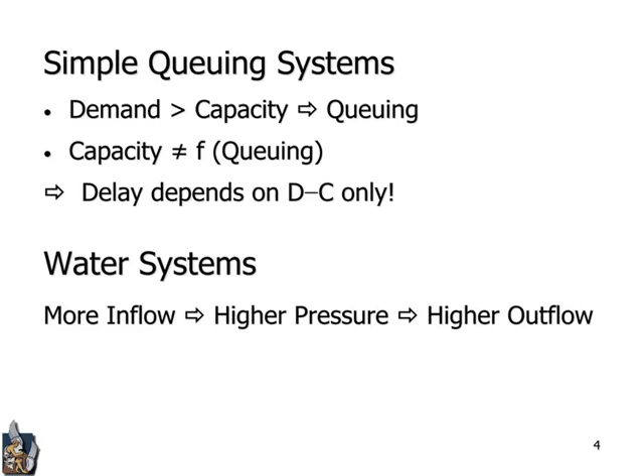There are other kinds of systems like water systems where things are completely different. If you have more demand, more inflow to a water network, then you have higher water level in the network, queuing, but this gives rise to a higher pressure and higher outflow. In fact, under higher demands and higher queuing, you get an increased outflow, which means that the capacity of the system is influenced positively, it increases with increased queuing, which is different than the simple queuing system.

Now, what happens with traffic networks? Well, traffic networks are different than both of those two kinds of networks because the congestion degrades the infrastructure capacity. Now, what are the reasons for that we will see in a few minutes. But if we take this as a fact, then at the start of the peak period, you may have actually demand at the local level, some links of the network, that exceeds the local capacity. And in this case, the local congestion degrades the local capacity.

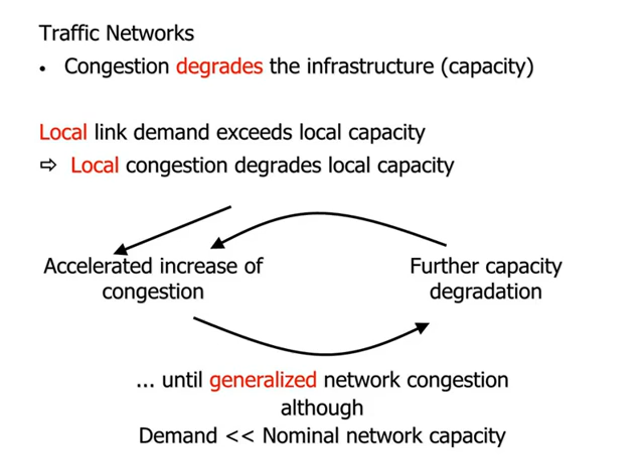This leads, of course, to an accelerated increase of congestion, which means further capacity degradation, which means further accelerated increase of congestion. And so we get a vicious cycle that eventually leads to a generalized network congestion over big parts of the network. Although, if you look at the actual demand, or if you look at the traffic flow that is actually served, it's much less than the nominal network capacity. That is because the network is degraded, and so the traffic that can be served is much less than the capacity.

This is an illustration of what I was telling. It happens to be the Ile-de-France expressway network around Paris. So you see Paris and the Boulevard Périphérique around it, and then secondary and other motorways. So the image that you see was taken on 12th January 2011 at 8:14 a.m. It's the morning peak hour. It was taken for a day where there was no accident or incident before this time. So the congestion is really a recurrent congestion. There is no implication of incident here.

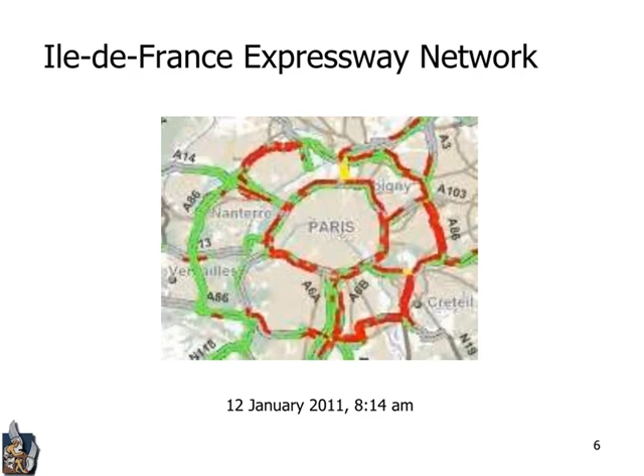And this means, of course, the red color is congestion, and you can imagine that the network does not perform as it should during nominal capacity. And this happens, of course, not just here, but in virtually any network around the world. So, in conclusion, the generalized motorway congestion that we experience daily is not only due to high demand. Of course, it is triggered by high demand, but it is then sustained and maintained due to the degradation of the infrastructure capacity.

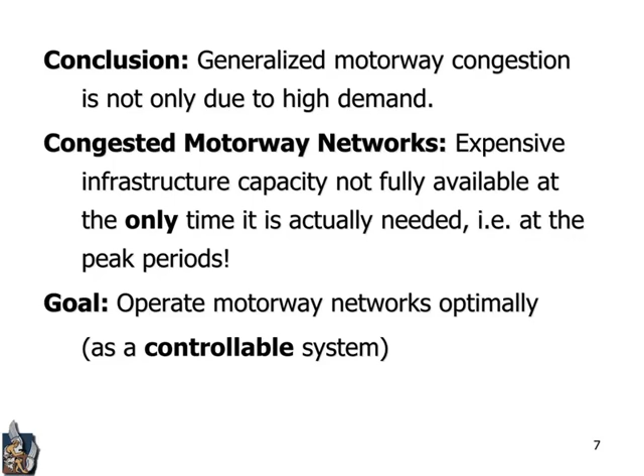And in fact, when our motorway networks are congested, this means that we have a very expensive infrastructure, expensive to build, expensive to maintain, which is ironically not fully available at the only time it is actually needed, which is at the peak periods. So off-peak periods, we don't need it anyhow because we don't have the demand, and then during the peak periods, we don't have it because of the degradation. And so the goal is to operate motorway networks optimally as a controllable system.

Now, to advance here, we need to ask the question, what are the specific reasons for the degradation that we mentioned before in the case of motorway networks? Well, as you know, usually bottlenecks are the origin of congestion. And a bottleneck can be defined simply by saying that it's a location where the capacity upstream is higher than the capacity downstream. And the bottlenecks are candidates for congestion, and we have bottlenecks, for example, due to on-ramps merging,

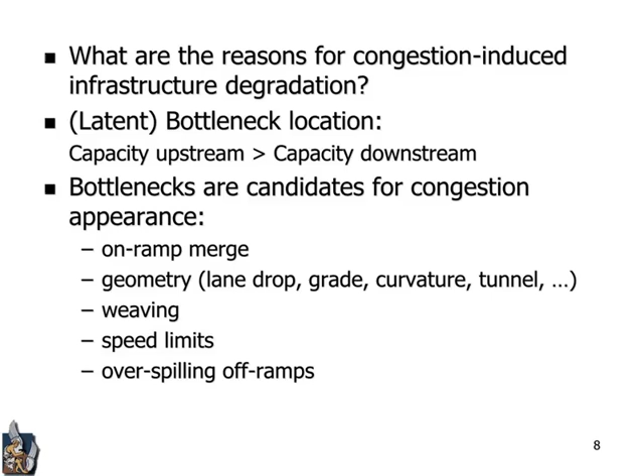or due to geometrical reasons: lane drop, grades, curvature, tunnel, bridge, and so on. Or a weaving section can have less capacity than another kind of section, or speed limits, and so on. So all these are reasons why we could have a bottleneck. Now, what happens at the bottleneck? We have two main reasons for the infrastructure degradation. The first reason is what we call capacity drop. Consider here on the slide a bottleneck, which seems to be a lane drop bottleneck, but it can be any kind of bottleneck. It doesn't need to be lane drop.

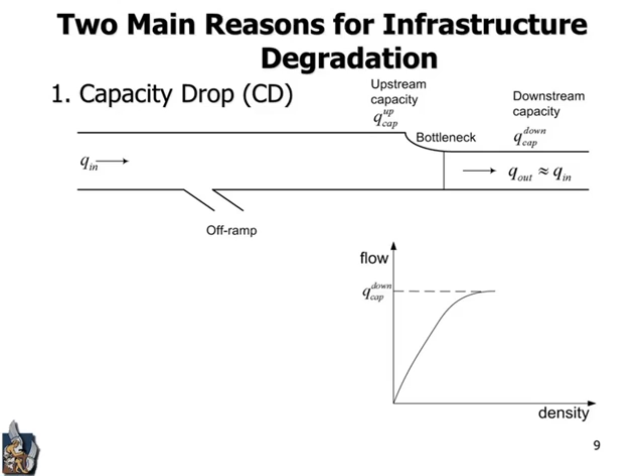So we have an inflow entering, and if the inflow is lower than the downstream capacity, which is essentially the bottleneck capacity, then it will go through, and there will be nothing spectacular happening. And if you see the diagram below, the fundamental diagram, flow versus density, we are talking about operating on the left-hand side of the curve, which means that this can happen up to the point where we reach the downstream capacity.

When we reach that, or when we exceed that, the bottleneck is activated, a congestion is formed, the tail of the congestion moves upstream, and the outflow, as you see in the fundamental diagram, drops at the area of the red crosses where the system now will operate, and this difference between the pre-breakdown capacity and the after-breakdown capacity is called capacity drop.

Although the reasons for capacity drop are not yet fully understood, there are a lot of people, including me, who believe that a major reason for that is the fact that vehicles need to accelerate at the head of the congestion from lower speed within the congestion to higher speed downstream of the congestion. And due to this acceleration, we have the lower flow.

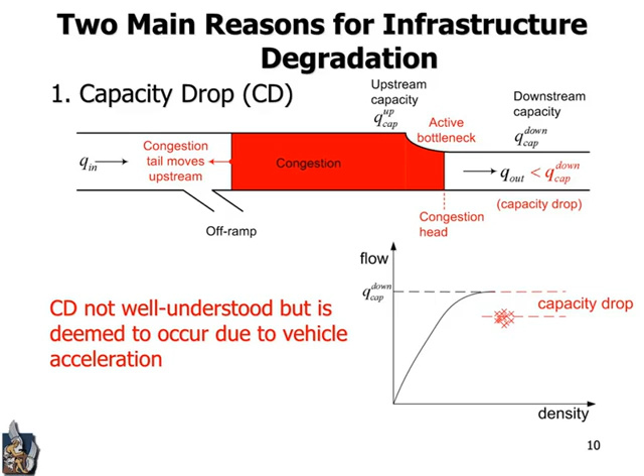So in any case, the capacity drop marks a significant, the numbers that have been reported range from 5%, 10, 20, 25% capacity drop. So this means that the infrastructure is actually degraded, because on our mainstream we now have whatever percentage, 10, 20% of flow less, of capacity less than before congestion. So this is the first reason.

The second reason has to do with off-ramps. The congestion that has formed will propagate upstream, its tail will propagate upstream, and will start covering off-ramps. So every time it covers an off-ramp, the flow of the off-ramp will be reduced, because the flow in the congestion is less than upstream of the congestion.

And so by what we said in the introduction, if the off-ramp flow is reduced, then the system, of course, will be degraded. In this case, simply because vehicles and drivers who are bound for off-ramps, who are not interested to pass the active bottleneck, they would exit before. But because of the extent of the congestion, they are also trapped in the congestion, they also experience delay, and in fact, they also contribute to an accelerated increase of the congestion.

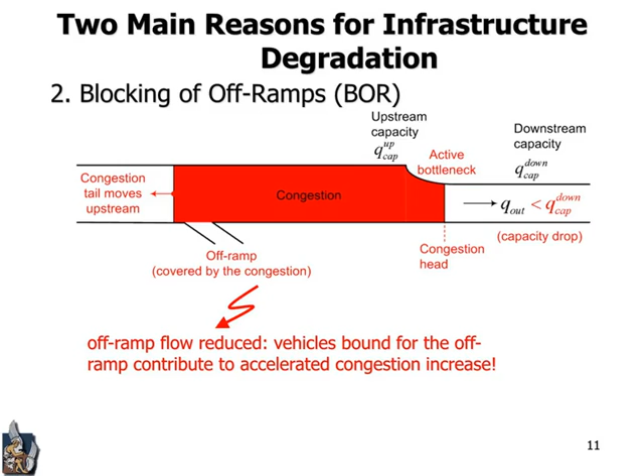And this happens every time an additional off-ramp is covered. And as you probably know, such congestions can be long, quite many kilometers, and can cover many off-ramps. We have seen that also in the image of Ile-de-France network.

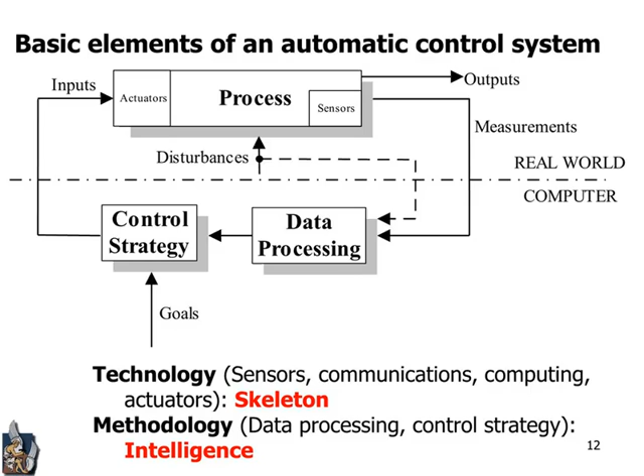So in this figure, we have a technological part, the sensors, the communications, the computing devices, the actuators, which is the enabling skeleton of the system. And we have a methodological part, which is the data processing and control strategy blocks, which essentially reflect the intelligence of the system. Particularly the control strategy is something like the brain of the system, because it is the one that makes decisions, and if the decisions are not appropriate, of course, all technology will not be very helpful in improving the traffic flow process. So the technology is enabling, but the control strategy is the brain that makes the decisions that have to be the proper decisions.

Now, what is the role of modeling in all this? We should say that traffic flow models are mathematical tools that imitate the process behavior. So in some sense, we could replace, ideally, the block of the process with a traffic flow model. Then if the traffic flow model is fed with the same disturbances and the same control inputs, it should produce the same output as the real process.

Now, traffic flow models are valuable for traffic control, because first we need to understand the behavior of the process if we want to design proper control strategies. In some cases, we may even have a model explicitly in the control strategy, like in model predictive control.

And secondly, because we don't go with a freshly designed control strategy usually directly to the field, we usually would like to test it via simulation or test different concepts and see what seems to be best to be actually tested in the field. Now, I should say, however, that although modeling is valuable, perhaps it is sort of overestimated in the research and in the publication.

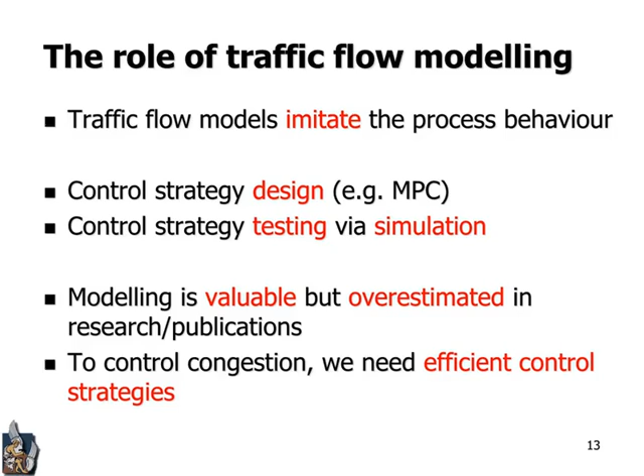So I think that if you make statistics, I never did that rigorously, but if you make statistics about how many modeling papers, how many control papers are published in various journals, then of course you will have a multiple of papers in the modeling area, whereas, as you understand, modeling is just a first step. And even if you could have a perfect model in any sense, that would by no means mark any direct improvement for the traffic flow process, because the traffic flow process can only improve by appropriate decisions. So to control congestion, we need definitely efficient control strategies.

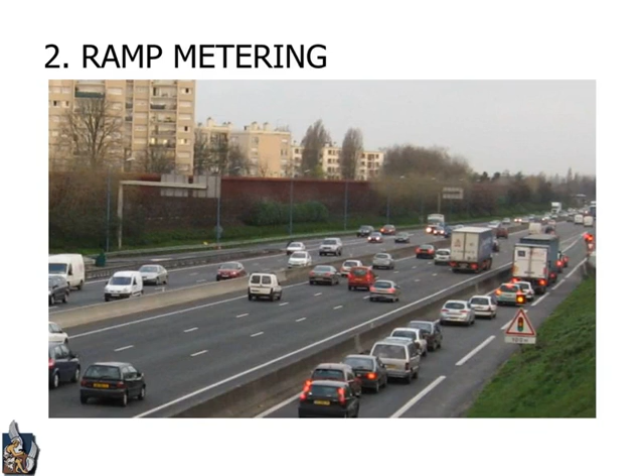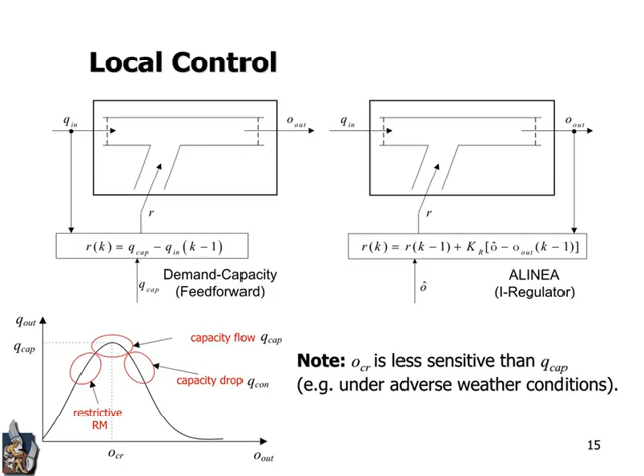Now, we should say that in the last 20 years, any new ramp metering installation around the world outside of the United States has been based on feedback, and specifically ALINEA. Very surprisingly, there is still no single implementation of ALINEA in the United States, although all other countries have or have switched to feedback-based strategies. This is something strange, given also that there are brilliant control engineers in the United States.

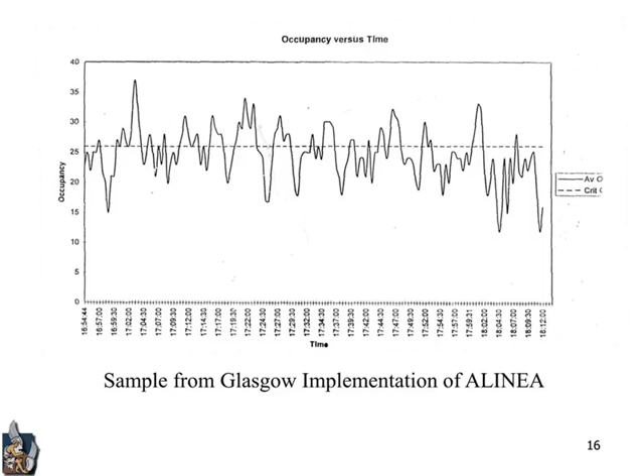Here you see a sample application of ALINEA, in this case an implementation in Glasgow, where the set point is 26%. That's the critical occupancy, and you see that the mainstream occupancy downstream of the ramp is maintained around the critical occupancy via the action of ALINEA.

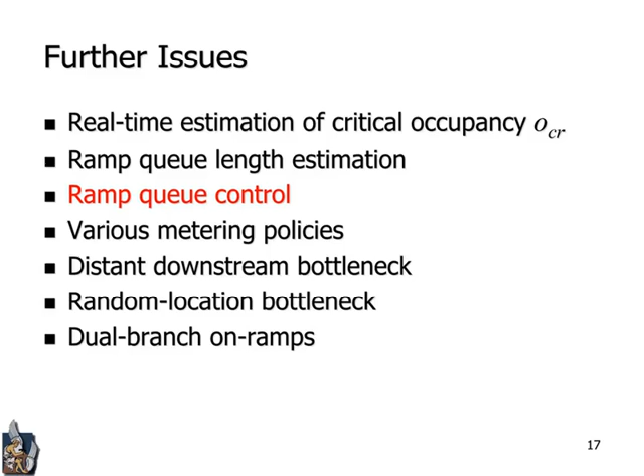Now, there are many other, they're not really details, but many other peripheral problems and algorithms that should be considered to have better and more efficient results. I will not go into any detail regarding these. I will just emphasize again the ramp queue control issue. We don't allow ramp queues to grow longer than a pre-specified space. And this is important. If the queue reaches that, then we need to apply some ramp queue control, which essentially means that we disable the ramp metering in the form of ALINEA or any control strategy that is being applied.

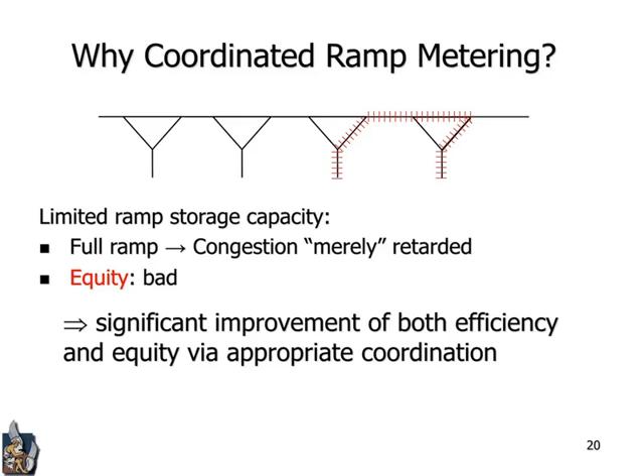In some way, we could say coordinated ramp metering should try in this situation to consider the whole available storage space as one single super ramp, rather than leave all the charge of addressing the congestion to the very last on-ramp. That would delay the onset of congestion much more, and in fact, in some cases, it might even lead to an avoidance altogether of the congestion.

Now, how can we apply coordinated ramp metering? How can we design coordinated ramp metering? One way of doing that, which is a rather sophisticated way, is via nonlinear optimal control. So in this case, we define an optimal control problem where we consider explicitly the limited storage capacity and other constraints. We have a model in state space discrete time form, for example, METANET, that reflects the nonlinear flow dynamics, and we also have an objective criterion, which can be, for example, the total time spent.

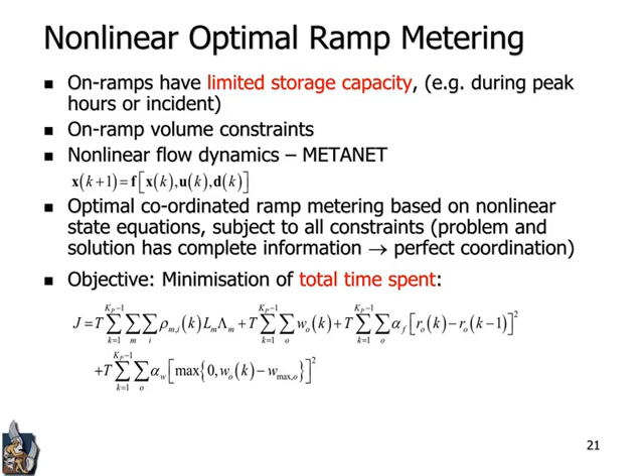Such a problem can take huge dimensions for a network of some size. It can include hundreds of thousands of variables, but still there is a possibility to solve these in relatively minor CPU time, about 1 CPU minute. There is a tool that we have developed called AMOC that solves this problem in a way that is invisible for the user. But what is most important is that such optimal control approaches have an inherent intelligence in the sense that they are able to tell us, for specific network and demand scenarios, what are the most appropriate actions that one would apply.

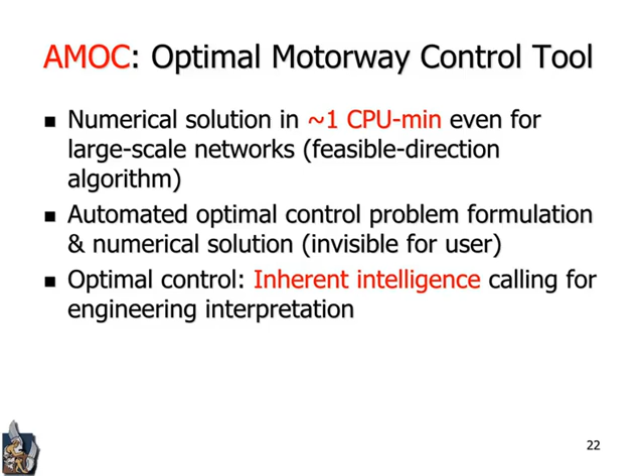And I can assure you, by experience of myself and my group over several application domains, including freeway traffic control, that you can very often be surprised by the optimal solution proposed by optimal control, in the sense that you don't expect this kind of solution to be beneficial, let alone optimal, and then you have to analyze and try to understand why this result was produced, and eventually you come up with an explanation and you become wiser by a tool, a program, just a code that you have developed, and this code teaches you what is optimal. So in that sense, you really can have some inherent intelligence in this system.

So let's see an example of application. What you see here is the ring road around Amsterdam. We only consider the counterclockwise direction. It's 32 kilometers long. It has 21 on-ramps and 20 off-ramps. And 4 of those on-ramps and 4 off-ramps are actually merging motorways. All the others are urban ramps. You can see in red the motorways that are merging. On the right bottom, you see A1, then farther left A2, then A4 on the left, and farther up A8. So these are merging motorways.

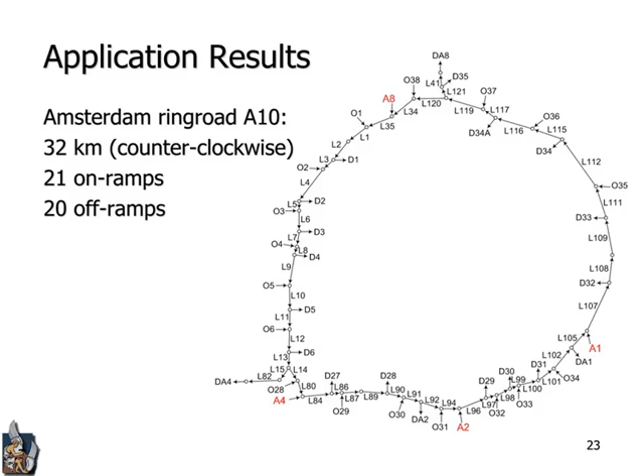And we can study the behavior of this network for the afternoon peak using a model like METANET mentioned earlier, which was validated with real data for this network, and the demands used for this simulation are also real, measured demands. So what we see as the outcome of the simulation is very close to the real conditions in this network. On the left diagram is density over space, that's the segments for the modeling, and over time, about 4 hours.

And what we see here is that right at the start of the simulation, there is a congestion triggered at the merging of A1, just below where A1 is positioned. This congestion propagates backwards and becomes stronger. Then there is a period of release of congestion, around 2 hours from the start of the simulation. There is another congestion triggered at the A1 merging, and this is much stronger, propagates backwards, and in fact covers half of the ring road.

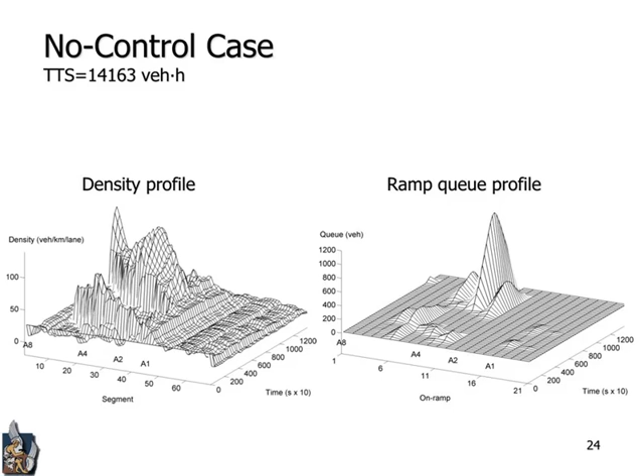Now we can play different games here, and you can use AMOC and say, okay, with the same density profile, the same demand and the same model, let's see what happens under different conditions. The first thing is to say, okay, let's apply ramp metering with queue constraints, but only for urban ramps. So maximum allowed queue is 30 vehicles, and only urban ramps are metered. The freeway-to-freeway ramps are not metered.

Now, we can tell what does it take to actually eliminate congestion and have a flat density profile. Well, it takes on top of this urban ramp metering to also have freeway-to-freeway ramp metering with 200 vehicles storage space for each of the 4 freeways. So if we do that, then we really eliminate virtually the congestion.

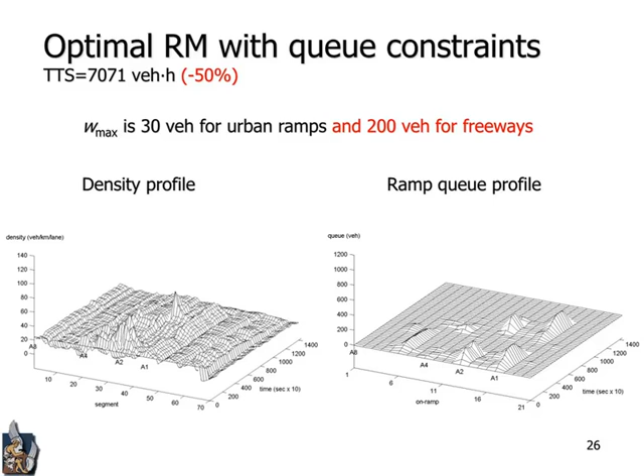You see that on the left-hand side of the diagram, and then on the right-hand side you see the queuing, which is according to the constraints. So the slightly higher queuing is only at the freeway-to-freeway ramps whenever it is needed. And the improvement is quite spectacular. In this case, about 50% of TTS reduction.

Now, the point is that optimal control has many advantages, as I said, but is quite sophisticated, a bit heavy, and perhaps also not very easy to understand by the operators. So what about something that is sort of simpler, more transparent, easy to understand by the operators? That was the motivation for us to develop a coordinated strategy called HERO.

And this one is based just on real-time measurements. There is no model incorporated in it. It is just feedback-based. And the idea is that you have independent ALINEAs for every ramp. But then on top of that, you have the logic of HERO, which essentially, without going into details, does what I mentioned before. Upstream ramps get activated by HERO in order to assist the downstream active bottleneck ramp to address the congestion. Of course, there are a lot of things included in there, but the basic idea is this.

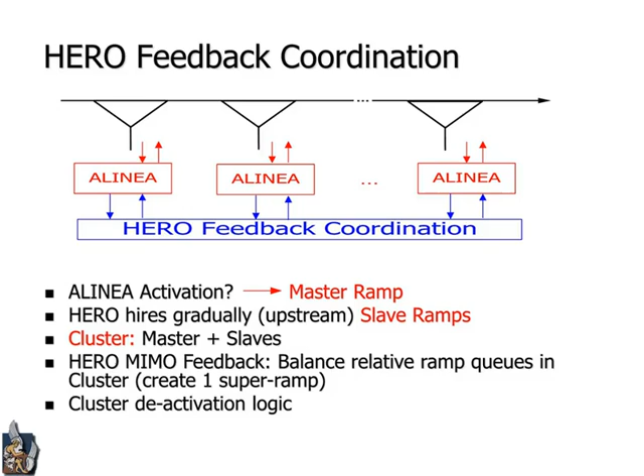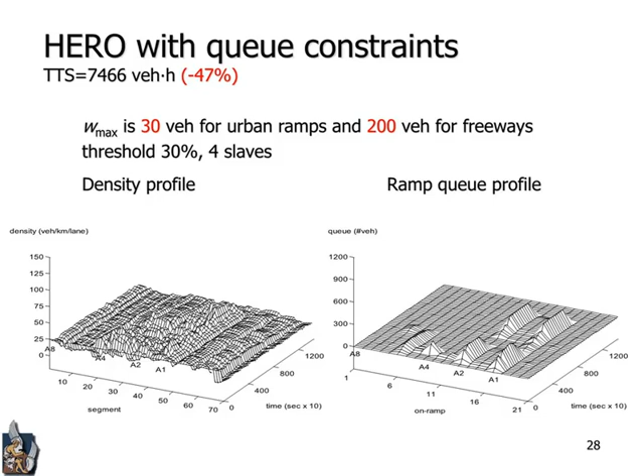Now, when HERO was developed, we were very lucky to attract the interest of a very progressive authority, which is VicRoads, the authority of the state of Victoria in Australia. And we agreed to have a test pilot for HERO at 6 consecutive ramps, and that had a very big success, led to significant improvements in all performance indices that are being used by the authority. And in fact, the authority estimated the payback period to be about 11 days.

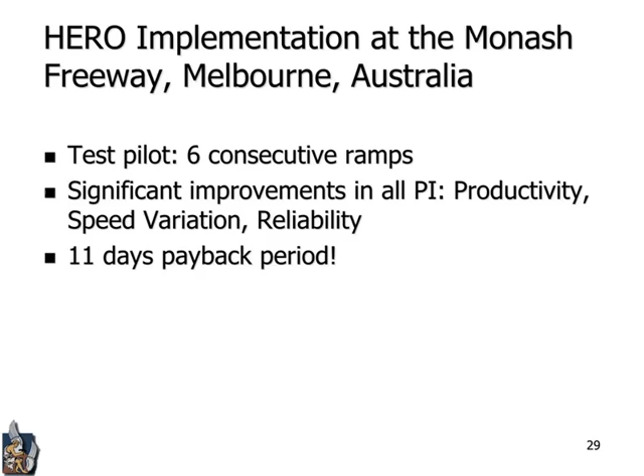And in this diagram, you can see the before and after situation, October 2007, October 2008. So every sub-diagram here is 1 day, actually the morning peak of 1 day. And so on the left, you see a lot of red, which is congestion. On the right-hand side, you see much less red.

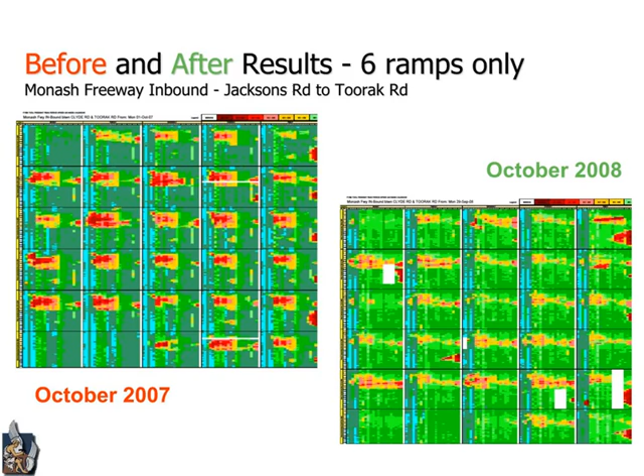And of course, we don't see just green everywhere because we have just 6 ramps, and the storage space was not sufficient to completely eliminate congestion every day. But nevertheless, you see that there is a very obvious improvement.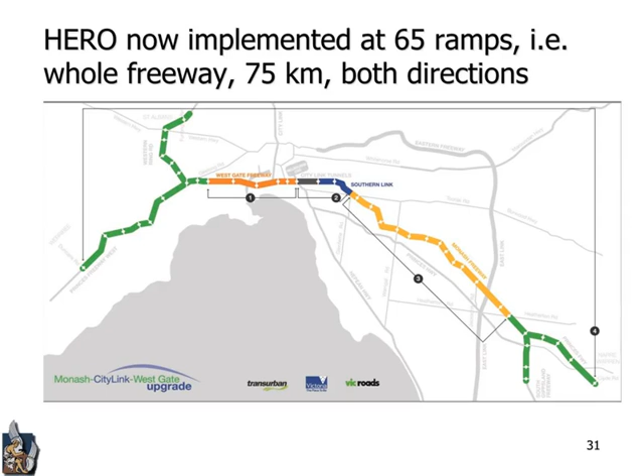And after this, VicRoads decided to implement HERO on the whole freeway, M1 freeway, 75 kilometers in both directions, meanwhile more than 70 ramps, and also at other locations, and there are other installations and also planning and implementation phase for other networks for HERO.

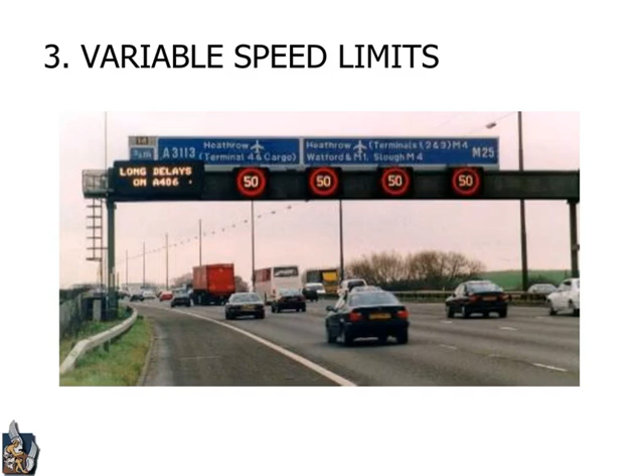So let's now move to another actuator, like variable speed limits. You see here on the photograph an installation from the UK, so here are 50 miles per hour. This was first introduced probably, there was also in the United States, but it was not automatic. I think in Germany were the first automatic systems in the late 60s, early 70s. Anyhow, the system became very popular, and you can see now variable speed limits around the world in many, many countries.

I should say that the system is great for traffic safety because there are a few evaluations, year-long evaluations that I know of, which show that there's a reduction of accidents 20–30%, which is of course excellent. But in terms of efficiency, we have much less success. Actually, I don't know of any evaluation that would conclude on an improvement of travel times.

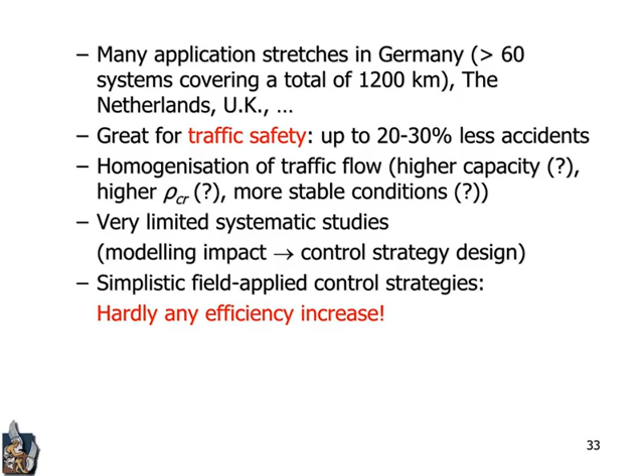Actually, there are several evaluations that indicate that there is a deterioration, an increase of travel times due to variable speed limits. And this is, in my view, not due to the fact that variable speed limits are not efficient as such, but because they are used based on very simplistic lookup tables. That means the control strategies that are being used are simply not efficient enough, and there is a number of researchers in the area that are now working in this direction, trying to produce more efficient variable speed limit strategies.

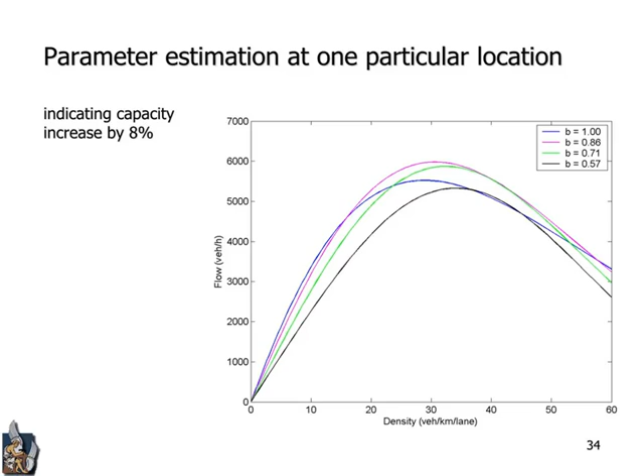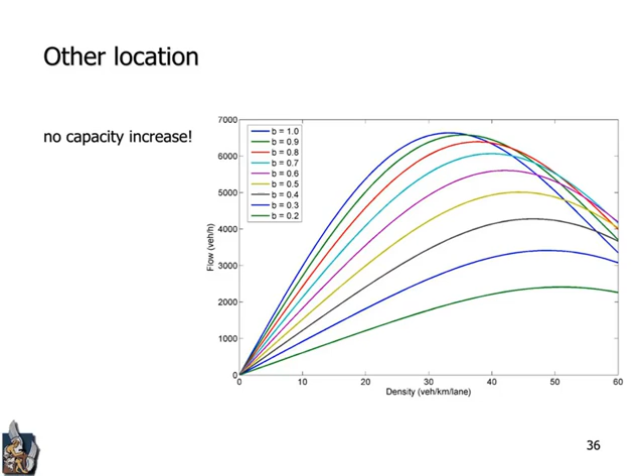So we thought, let's see what our intelligent friend AMOC would say if we would take the same scenario as before, but tell it that all you can do is to change the variable speed limits in this network. What would it tell? And we were very surprised to see an improvement of 47%, almost as much as optimal ramp metering, resulting from this exercise.

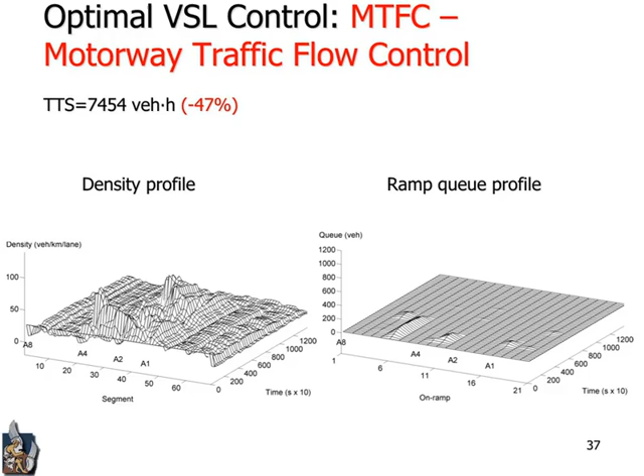And so we had to really look more carefully at what this guy was doing, and then we saw that he was exploiting the reduced capacity of fundamental diagrams when I apply variable speed limits in order to apply mainline metering, mainstream metering, upstream of the main active bottleneck of this freeway. That means upstream of A1. So we called this MTFC. It is not motorway traffic flow control, but mainstream traffic flow control, enabled by variable speed limits. And this is what was leading to this improvement.

And in fact, after seeing that, we thought, okay, optimal control has some disadvantages that I mentioned before. So let's try the same thing with feedback. So you see in this diagram that we can take measurements from detectors and then apply a similar feedback control algorithm like ALINEA, but now it is applied to a different actuator, which is variable speed limits.

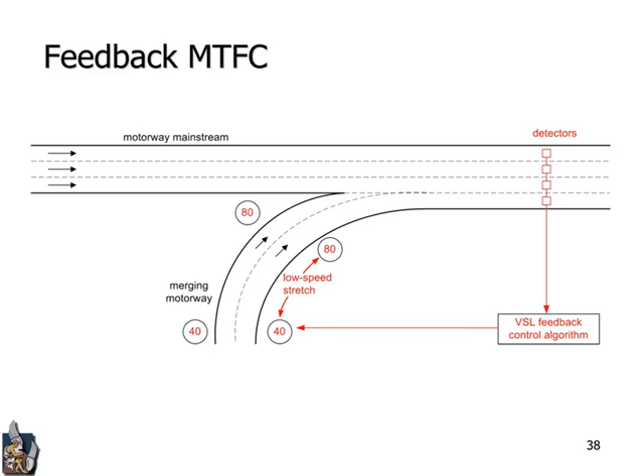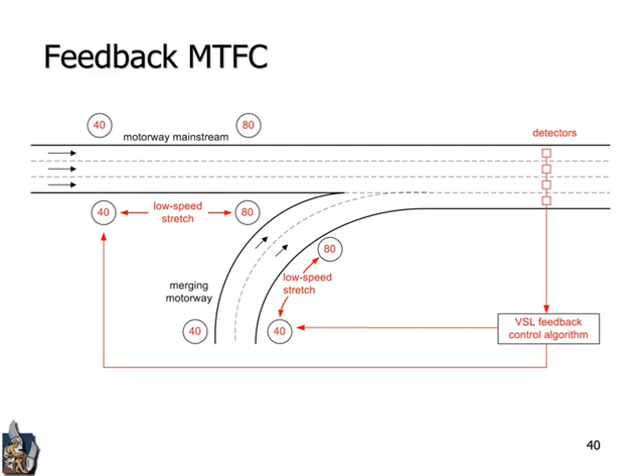For example, in case you have two main motorways merging, you want to maximize the throughput at the downstream. Then if you don't want to use traffic lights, you can use variable speed limits on one branch or on the other branch or on both branches. And in this case of both branches, you have an additional degree of freedom that you can use, for example, to have equal delays on both branches. And of course, the main thing here is always that we want to maximize the throughput at the detector location.

The same can be done also with regular on-ramps. And this actually can be generalized. We can have generally bottleneck throughput maximization, not just for on-ramp merging and motorway merging, but for other merging cases like toll plazas, motorway work zones, mainstream lane drops, but also other types of bottlenecks like weaving sections. We can apply that upstream of weaving sections to maximize the throughput, or other kinds of bottlenecks like sags or curves or tunnels or bridges.

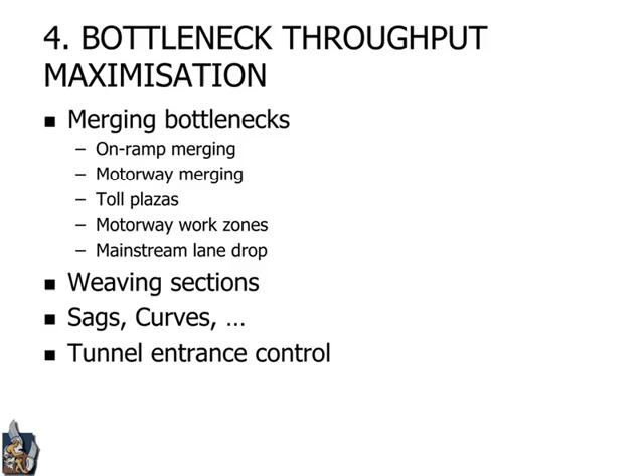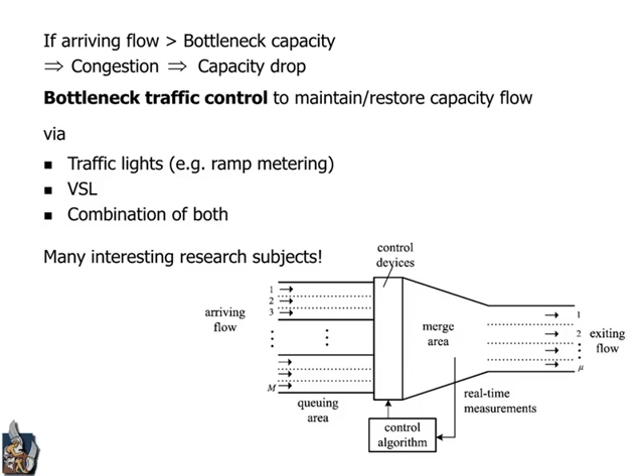So all those bottlenecks which produce a capacity drop when you have a congestion can be addressed with these tools. And the idea is the same. We want to apply feedback control. We take a measurement or an estimation from the merge area in case of a merge bottleneck, or from the congestion area in the case of other bottlenecks, and then we feed that to a control algorithm that controls the inflow by use of actuators like traffic lights or variable speed limits.

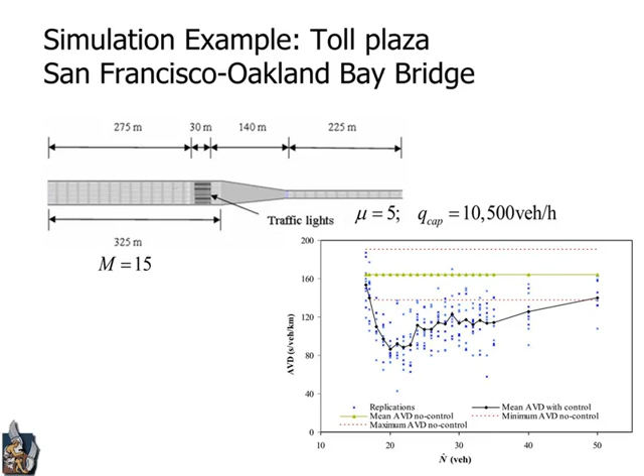So this is the case of application for a toll plaza, in this case San Francisco Oakland Bay Bridge, where you go from 15 lanes upstream to 5 lanes on the bridge freeway. And of course, after passing the toll booths, you have the corresponding merging area. And you see here what should be a microscopic simulation, but we don't have the possibility in this system to have it moving. But you can imagine that when the inflow is higher than the outflow capacity, then you will have something like that in the merging area, and all these merging conflicts and accelerations of vehicles lead to a drop of the outflow. Now, it is clear the drop of the outflow is due to too many vehicles being included in this merging area.

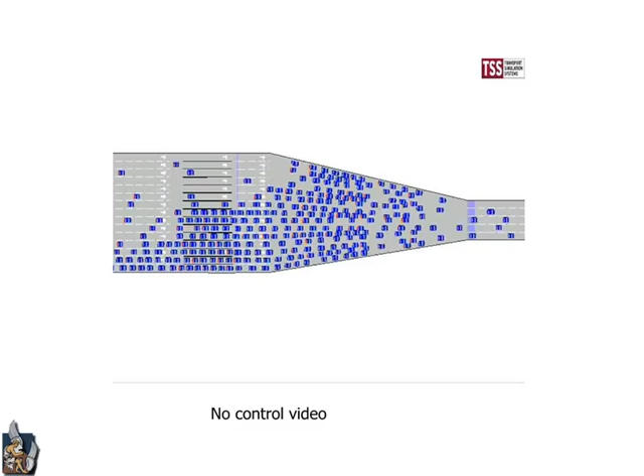If we would have too few vehicles in the merging area, then the outflow would starve for flow. So too many is not good, too few is not good. Somewhere between the two, there must be some magic ideal number of vehicles in the merge area that produces the maximum throughput. And this is exactly what we can do with feedback control.

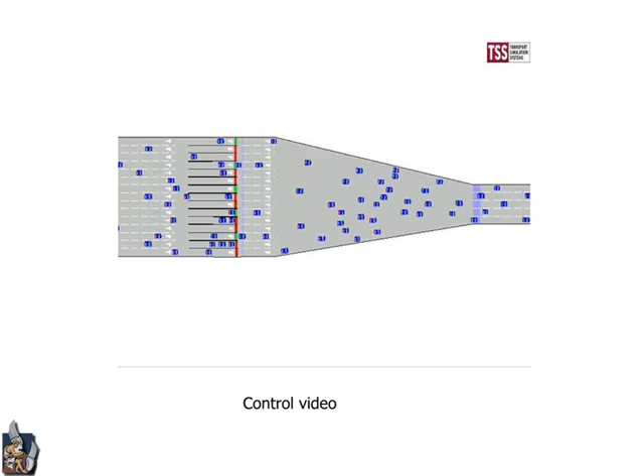This is the case with control. Now you see on the left side those red and green bars, which are traffic lights. And the idea here is that you take a measurement from the merge area, feed it back, control the traffic lights, and the goal is to maintain the number of vehicles in the merge area as close as possible to the number of 20, which produces the maximum outflow. And that's all. Then you can improve your outflow by 10–15% in this case, because you avoid the congestion in the merging area. Similar for work zone control, we don't need to repeat that, corresponding simulation.

Now, I hope you are not too tired, so that we have a few more minutes to talk about the future of motorway traffic and control, which has actually started in the sense that we have already vehicles with adaptive cruise control on our streets and several other systems. So if you recall the basic elements of a control system that we had in the introduction, the process was conventional vehicle flow. The sensors were spot sensors like loops, vision, magnetometers, and so on. Communications usually wired, and computing usually either central or hierarchical, in some cases decentralized. And the actuators are roadside, ramp metering, variable speed limit, variable message signs, and so on.

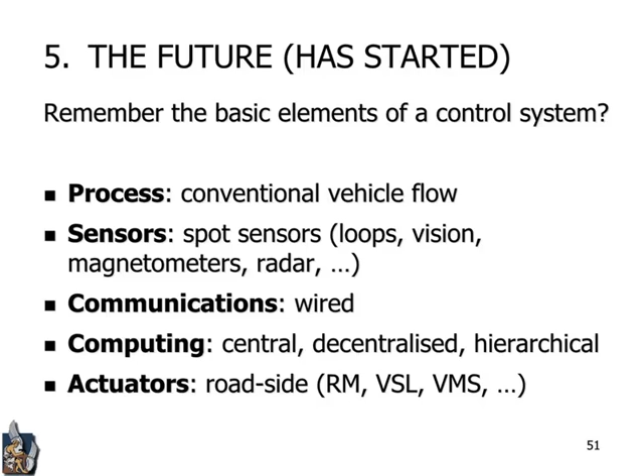Now, what comes in the future, and is partially already there, are quite strong differences. The process will be now consisting of vehicles that have enhanced capabilities. ACC, for example, means that you can forget about all car following behaviors of drivers, because now the system does it. So this influences the traffic flow. The sensors can now be vehicle-based. If the vehicles can communicate with other vehicles and with the control center, then you can have massive data from vehicles about a lot of things that you did not even dare to think about before.

Communications will be mostly wireless: V2V, vehicle to vehicle, vehicle to infrastructure, infrastructure to vehicle. Computing, again, can be central, decentralized, or hierarchical, but now you have the possibility to have it massively decentralized, in the sense that a lot of things can happen within the cars. So you can have parts of the control strategy, and some people even dream of having the whole control strategy in the cars, decentralized.

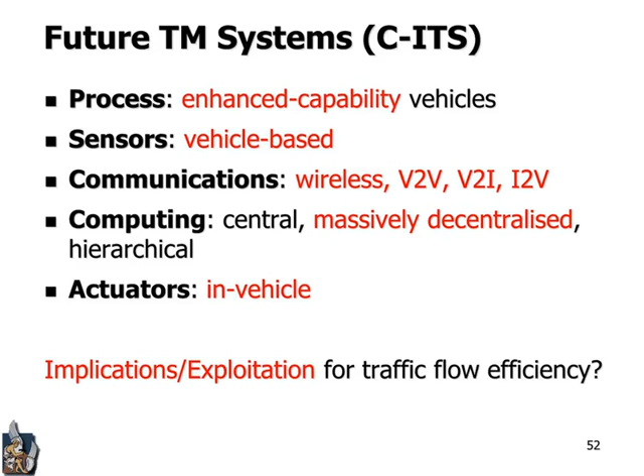And of course, you have in-vehicle actuators, because now you can tell vehicles what to do in terms of routing, in terms of speeds that they are going to use, in terms of lane changing and so on. So this opens up a whole new area of needed investigations, in order to study the implications of these systems for the traffic flow, and then, of course, exploit them for better traffic flow efficiency.

The main developments, which we sometimes call VACS, Vehicle Automation Communication Systems, can be classified in three categories. So we have the in-vehicle systems, sometimes called automatic vehicles or advanced driver assistance systems. The vast majority of these systems are related to safety and convenience of the driver, which is good, but there are a few that have direct traffic flow implications. And so these are the ones that we need to focus upon.

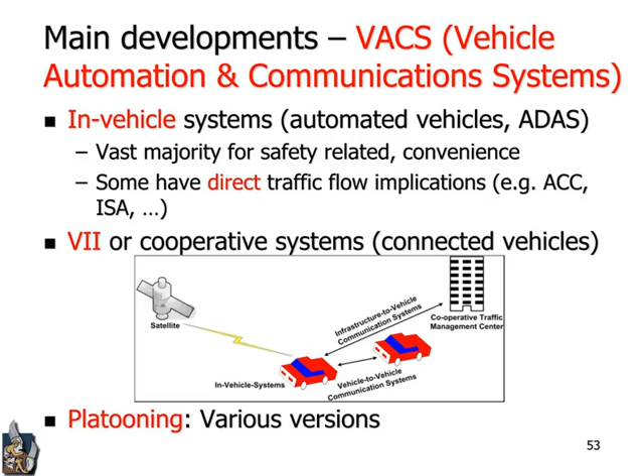Under a different viewpoint, we talk about vehicle infrastructure integration, VII, or cooperative systems, or connected vehicles. And this is when vehicles actually can talk to each other and with the infrastructure and exchange messages. And then under a different viewpoint, again, we have platooning, various versions of platooning in our streets, which probably will require also corresponding changes in the infrastructure.

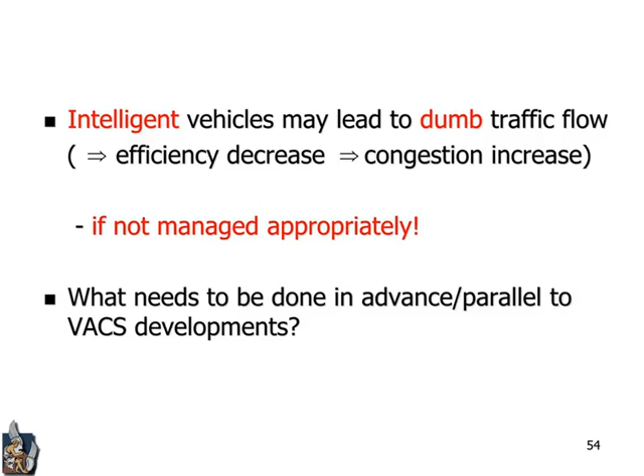So the basic point to keep here is that intelligent vehicles may lead to dumb traffic flow. There are specific examples where having this intelligence in the vehicles is detrimental to the traffic flow. So we can, in fact, make things worse if there are sufficient intelligent vehicles on our streets. When? If not managed appropriately. So we need to continue with freeway traffic control, traffic management in parallel to those developments of VACS that are ongoing, emerging, and some of them are already on our streets.

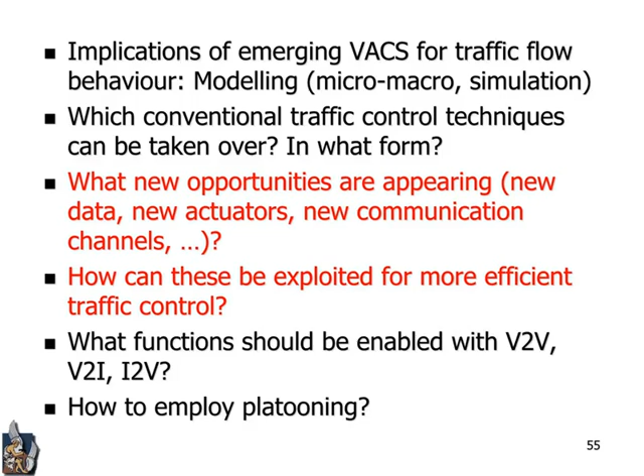So what needs to be done? We need new modeling approaches and tools, both microscopic and macroscopic. We need new simulators; a lot of colleagues have worked on that, and some of them are already around. We need to ask which conventional traffic control techniques can be taken over in the future. But most importantly, what new opportunities are appearing with all these new data that we will have, new actuators, new communication channels, and so on. And how can all these be exploited for more efficient traffic control? So these are very important questions.

So there are many challenges here. The system now is very large scale because there are so many cars that have an identity in the system as sensors or as actuators. They are not just particles of the flow. The evolution path is uncertain. We don't know which of those VACS will actually appear on the streets and in what order. There will certainly be a gradual penetration. So that's also something that may cause difficulties, because we need to have tools that will be applicable under different penetration rates.

And there are many other issues that are not within our domain, like the deployment scenarios, security issues, liability issues, insurance, legal aspects, standardization, but also human factors. These things need to be accepted by drivers, and this is very important. It's not our work, but it's very important that these are accepted by drivers. Otherwise they will not actually appear on our streets. So I hope you are not too tired.